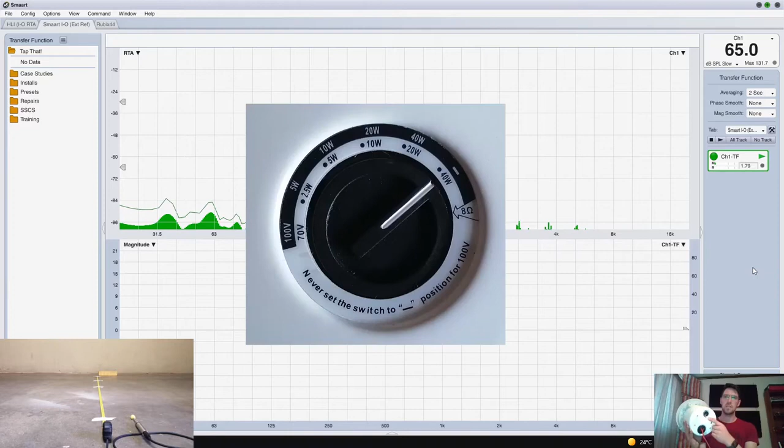This ceiling loudspeaker has got a tapping setting for the transformer to give us different impedances at each tap, resulting in a different output wattage and then hopefully in a different level output as well. That's what I'm going to be measuring today. So I have a 100-volt line amplifier. I'm set up in my garage.

I'm going to be measuring at 3 positions for each of the tapping settings: 0.5 meter, 1 meter, and 2 meter. Hopefully I'll be able to see some inverse square law results with half distance and double distance. And then at the different tappings, the 5, 10, 20, and 40-watt tap, we'll also hopefully see some level variances.

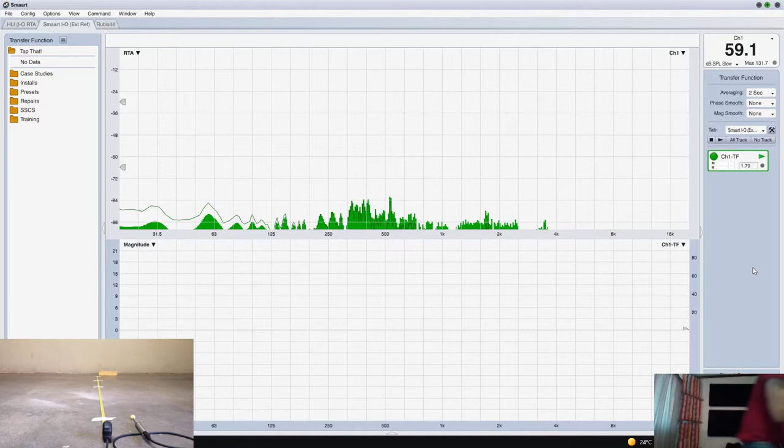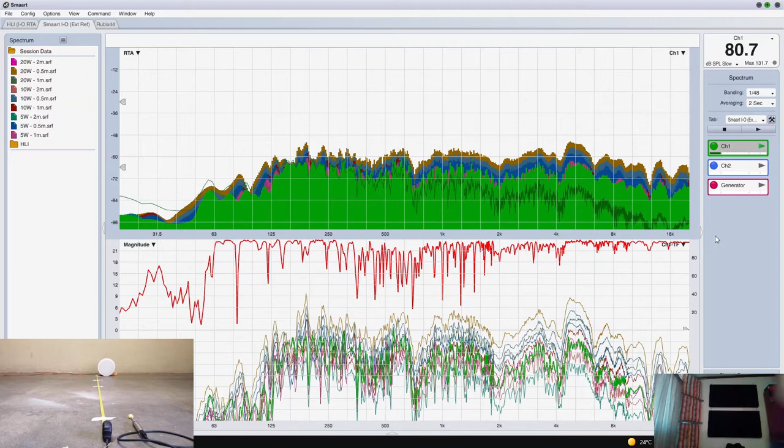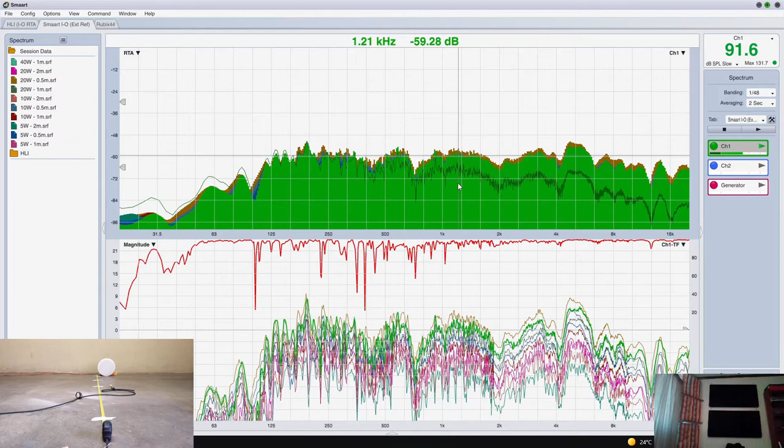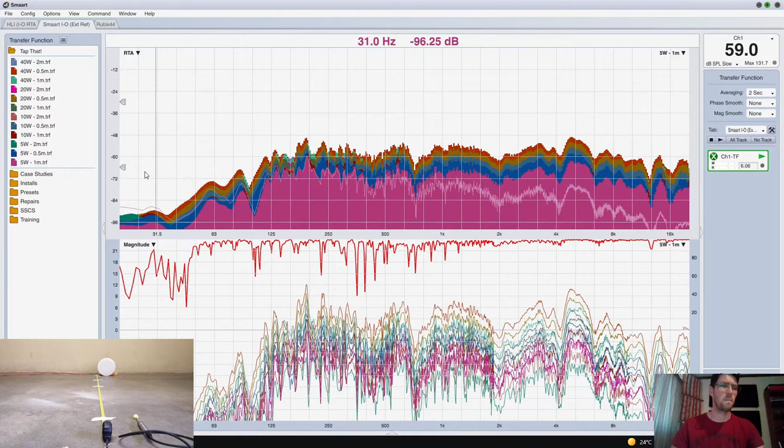My microphone is calibrated with amplitude, and the amplifier is going to stay at the same volume output for each tap and each measurement. Okay, let's get measuring. Okay, so we have some information here. Now I've measured at each tap, 5 watt, 10 watt, 20 watt, and 40 watt, at 0.5 meter, 1 meter, and 2 meter.

Okay, let's start with 1 meter away. I'm not really looking for frequency content, I'm more looking for SPL content. I know the speaker is not completely flat. It is a ceiling speaker made for public address background music. So I'm just looking for the level information as opposed to the frequency information.

Okay, so hide all of these traces and let's have a look. Let's start with 5 watt, 1 meter. And then 10 watt, 20 watt, and 40 watt, 1 meter. Let's zoom in onto this RTA response a little bit. There's the 4 traces of the different wattages. I'm going to zoom in here as well and smooth this magnitude so we can see a bit of separation.

Okay, so let's pick one frequency, and we'll cycle through. It looks like they all have pretty much the same frequency response, so I'm just going to pick one. Let's pick here at 3.2. If you look at the top right hand corner, the 5 watts at 1 meter is minus 65 decibels. Let's go to the next one. That is 40 watts. I'm cycling a little differently here. Let's start with 40 watts.

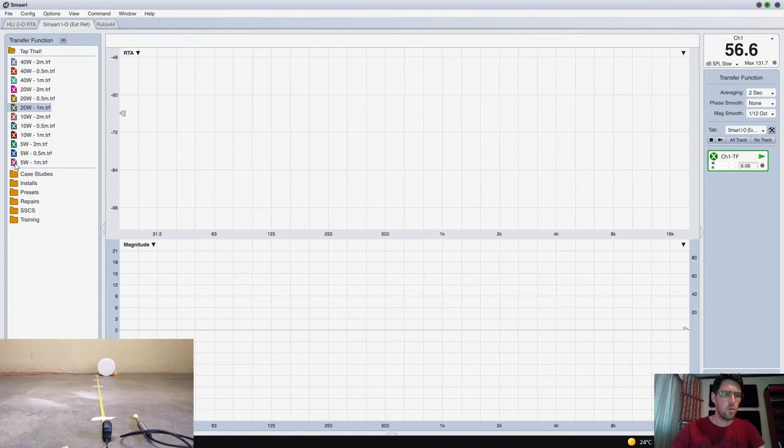Okay, so let's compare the different tappings to each other. Currently in the magnitude response I've got nothing selected. So let's look at the other tappings compared to the 5 watt tap. That's at half a meter. 1 meter 10 watt tap, that's pretty close. Half a meter, that's louder, and that's a lot softer.

So if you wanted to match ceiling speakers at different heights, say one is lower by half a meter than the other, you could use the tapping to adjust the output level between the two. Let's look at 1 meter 10 watt. Let's go 2 meters. If there's a meter difference between the two, you could also use the different tappings to get that level difference at the listener without zoning and adjusting volume. You could just use the tappings to compensate for the height differences in the ceiling.

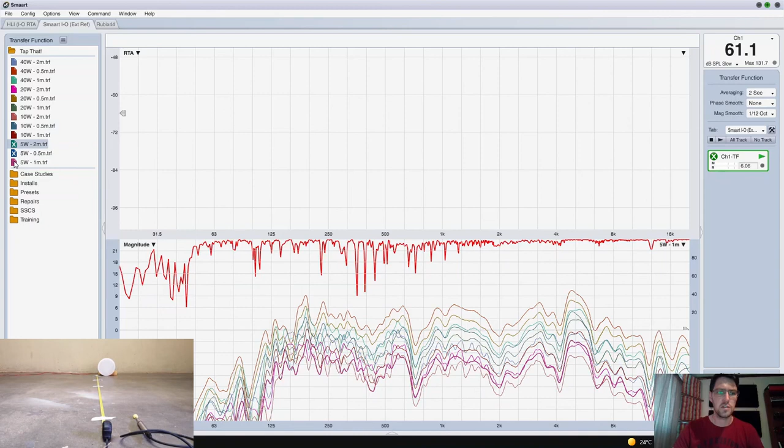Quite interesting to see how 40 watts at 2 meters compared to 10 watt or 20 watt at 1 meter are very close. So if there's a 1 meter difference between two areas, you could put the higher speaker at 40 watts and the other one closer to the listener by 1 meter, considering that distance also needs to be a meter because it's doubling the distance. You can get that level control. But don't trust my word for it.

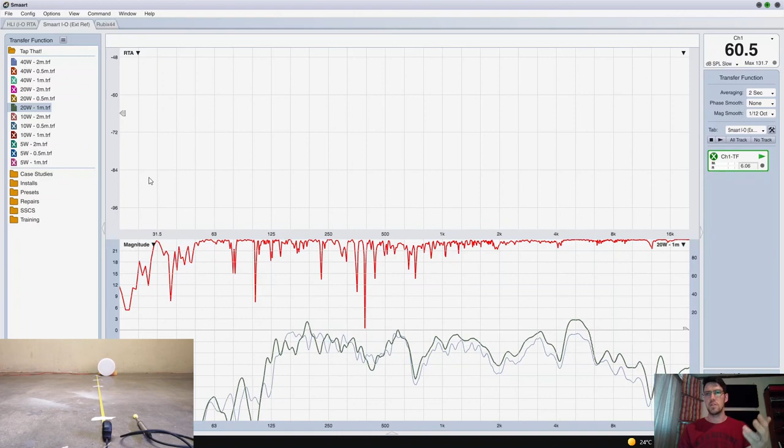Go measure it. This is a very useful application for installing loudspeakers where you might have 20 loudspeakers on one amplification line, and it's impossible to do volume adjustments for different zoning, but you can using the different tapping on the loudspeaker. Great.